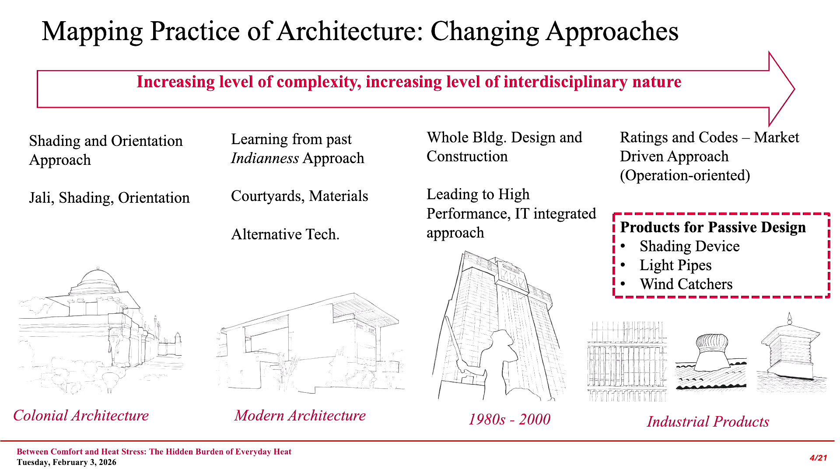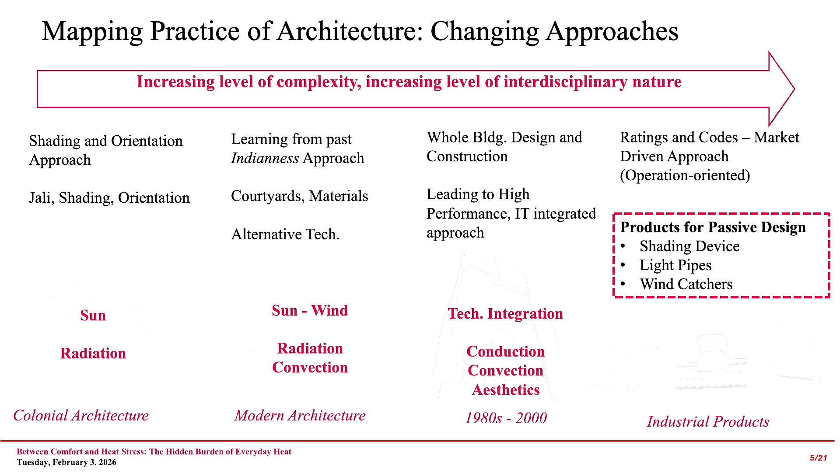So this is basically what I explained: somebody was dealing with the sun and radiation. In fact, in modern architecture, even Corbusier had dealt with the sun and wind very well, which is basically radiation and convection, and then radiation, convection, and conduction, and all kinds of IT systems started coming in. However, from then onwards, the liberalized economy has given us something where you cannot really make any visual difference, whether it is 0 degrees north or 50 degrees north. Delhi buildings are very similar to the buildings you see in the rest of the world. That's when homogenization of aesthetics started happening.

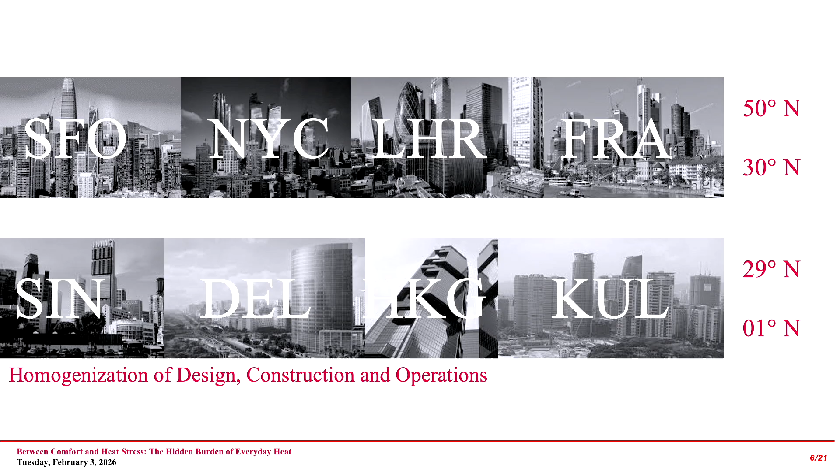And the shift happened towards what we call a tech fix. Architects started leaving the decisions of making buildings comfortable to the engineers. Most of the time we design it in an ABCD manner, and somebody will make it comfortable, somebody will make it stand. So structural engineers also started taking a little more responsibility. And that's where things started changing. While we recognized that, in parallel we also started understanding that some of the buildings which were originally made keeping the climate in focus did not serve as per their original intent.

So I'm giving probably 3 examples here. One is IIM Ahmedabad, second is IRMA, and that is in Anand, and third is again the ATIRA building in Ahmedabad. This is basically a piece of modern architecture. If you look at the plan, section, elevations, you will see that there is a very clear-cut response to the hot and dry climate or composite climate. That means you have thick walls, smaller windows, a bit of courtyards here and there.

However, these buildings did not give enough thermal comfort to the occupants, primarily because of the landscape. So this is where the disconnect started happening. The buildings were made and constructed keeping in mind the climate, but probably the microclimate was not conducive enough for those buildings to remain in hot and dry climate, and it started making a huge difference in terms of vegetation, and the humidity started going up, evapotranspiration rates started going up, and buildings did not really function the way they were designed. So this is what has happened from 1960 to 2015, 2020.

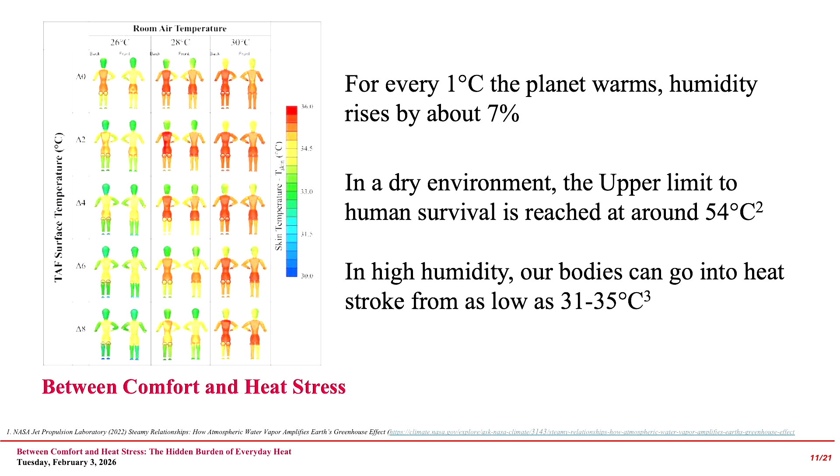And that's where some of the work we are doing with some of the colleagues here has started focusing: how do we really look at humidity as a part of the game. My strong belief is that buildings can deal with temperature plus or minus in some ways, but to deal with humidity, a building as an entity, as a system, has a lot of limitations. And probably I can explain that in a while.

Can buildings really provide us thermal comfort with all passive strategies? I'm not using the words passive cooling strategies because I have some reservation towards the passive cooling terminology, and I believe that passively you can't cool anything. You can cool only with an active system. What you can do is delay, or reduce, but you can't really cool. So with all the passive strategies we are doing, can a building give us comfort, not even heat stress?

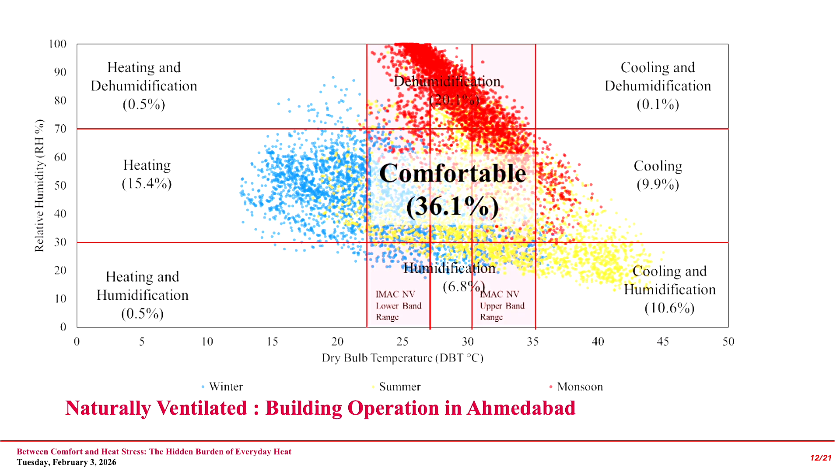And this is the chart which tells you that in Ahmedabad, if you design your building with all passive strategies, in about 36% of the hours of the year you can achieve that through buildings. The rest of the time, you will require either dehumidification or humidification or active cooling, or sometimes heating as well. The two bands are the lower band and upper band of the adaptive model. That means our sensation keeps varying between summer and winter, depending upon what the outdoor conditions are.

Humidity, again, I'm focusing a little bit more on this. In October 24, during the air show in Chennai, people lost their lives. They were hydrated, they had protection from the sun, but the wet bulb temperature, the relative humidity, was so high that they simply could not keep pace with that, and they lost their lives. So again, buildings do need to deal with humidity over a period of time, and that's where the focus is.

Another challenge we have started getting is that we are losing the shoulder periods. Typically in India, winter starts around October and ends around February, then March would be a shoulder period, and from April 15th onwards things start getting warmer. Historic data suggests that the shoulder periods, both March-April and September-October after the monsoon, are reducing.

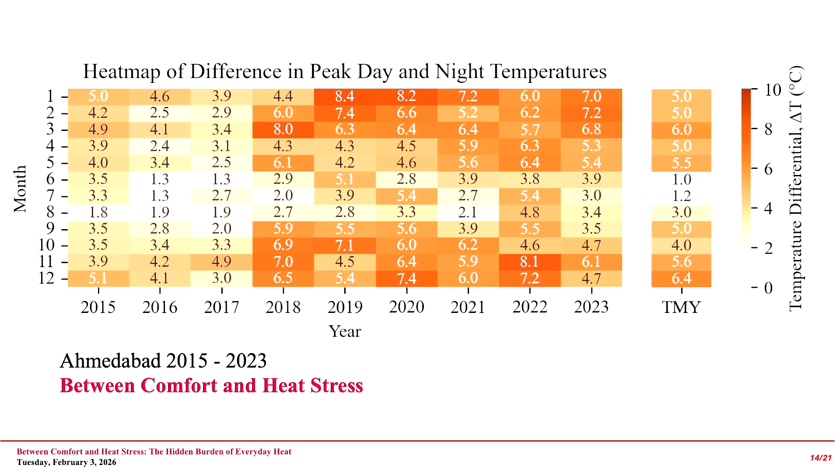Another area, not just about buildings, and that's where I also believe that we need to deal with urban heat. If all the cooling strategies or all the passive strategies need to work, we really need to make sure that our larger setting does provide a similar kind of situation for them to operate.

In the past, in a lot of papers, you'll see our argument about old historic precincts. In Ahmedabad, we call them pol houses. In Maharashtra, they call it Wada. Or in Lucknow, they call them Havelis or Kothis. They used to provide thermal comfort because the larger urban setting was not that warm. Now, the cities have grown, urban settings are warmer, and that's where these historical or vernacular buildings are not the ones who can provide us thermal comfort.

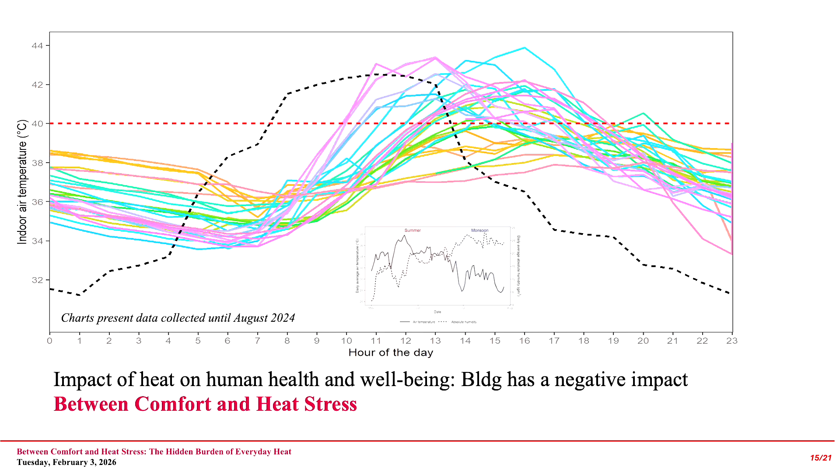The kind of evidence we have started getting also leads us to question sometimes whether nature-based solutions are the way to go. In some cities, definite results say that you can't have trees in a warm and humid climate, because trees increase the evapotranspiration rate, increase the humidity immediately around the buildings, and the latent load goes up, not just the sensible load, and that also increases the cooling. The moment you start cooling, there's heat rejection outside, and you are in a downward spiral. So how do we deal with passive strategies at the city scale is where we are looking at some of the solutions.

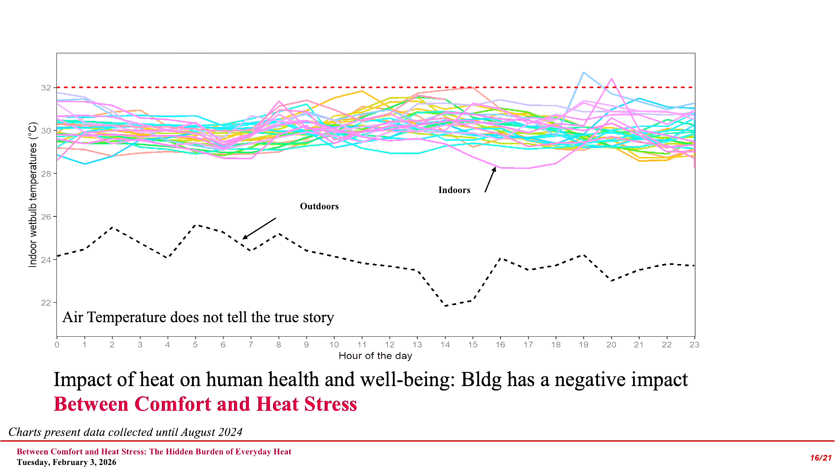This is also another example where your outdoor is lower than your indoors. This is where the building starts giving stress. One of my interviews in the newsletter has this particular part, that the primary function of the building is to provide us comfort. And when buildings do not provide comfort, what can we do? It's basically our third skin. Our first skin, then the clothes, our second skin, and the third skin. If the third skin is not helping us, we really can't manage. And that's where I would like to see the urban scale as probably the fourth skin. And if that fourth skin started helping us, probably the third skin might be useful.

Our work in Chennai does suggest that some of the hotspots in Chennai do not remain hotspots across the day. Some of them are hotspots during the daytime, but they don't remain hotspots during the afternoon, and they don't remain hotspots during the night. And this is where the presence of vegetation and water bodies also comes under the scanner. Do you really need to provide deciduous trees or trees having high evapotranspiration rates in Chennai? Probably not. You might require a ground cover to reduce the radiation, or you might want to see the sky when you have a concrete footpath, pavements or parking lots.

But having concrete pavements and a tree on top, you're not seeing the sky and you're not re-radiating things back into the sky. That means your cities are getting warmer and warmer over a period of time. And this is where some of the solutions we are trying to find through our research, by working with the local government, hopefully we should be able to get there somewhere.

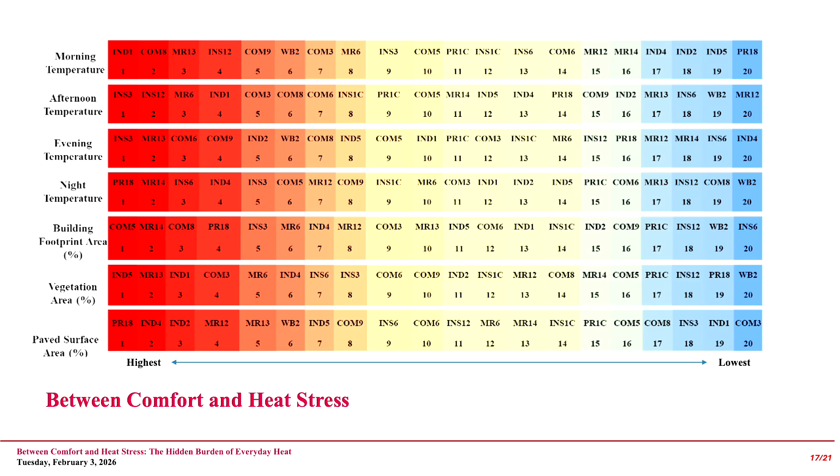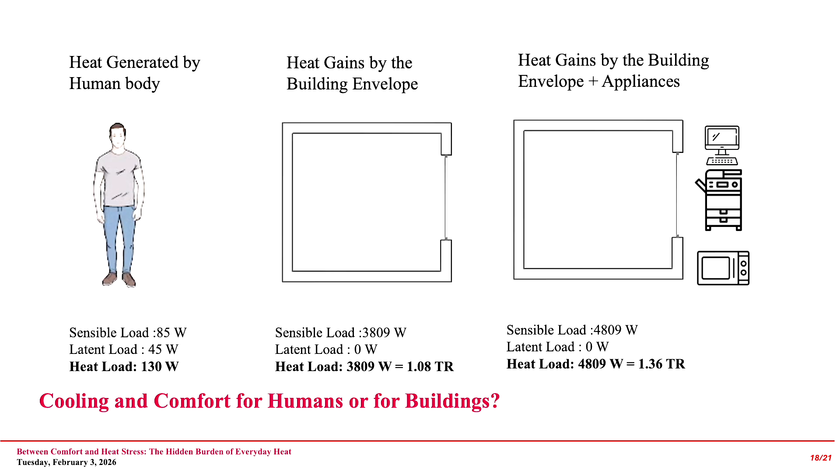Now, if I have to function in that building, probably I'll require some more gadgets here and there. It will go up to probably about 4,800 watts, which is about 1.36 tons of refrigeration. Body requires 130. What we provide with the buildings is about 4,800. And this is where probably we need to do something so that buildings do come closer and closer to that particular part.

And the last point from my side, coming from a university, I really need to think about how do we inculcate some of the culture in the students so that they start integrating this not as a separate layer or as a consultant or someone who can help them out, but from a design point of view, how do they start learning this from day one?

If there are architects in the room, they will recognize that we are being taught proportioning systems, right? How do you really design, whether it is Indian proportioning systems or something from modern architecture? When you start designing buildings, you do deal with numbers in terms of proportioning systems.

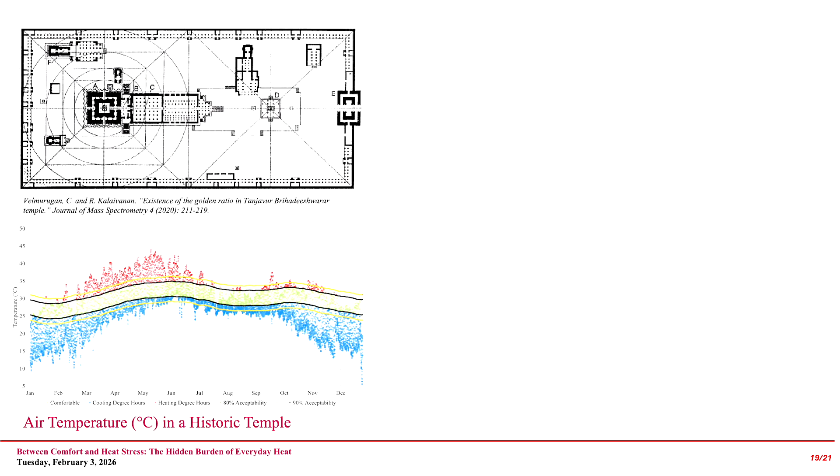In India, we have a very large and very consistent organization of students. What they do is keep doing measured drawings of historic buildings or modern buildings, and there will be a good amount of archival documents available for somebody to look at how these buildings have been designed and constructed. So they do measurements. What we don't do is environmental measurements of any of those buildings.

We do teach how to design a structure. We do teach how to cost estimate, how much time your building will take. So all this is quantification which we teach other than the semantic part. We sometimes also teach how much energy the building will require or how much water the building will require. But we don't teach how much energy the building will use.

So in technical terms, we do calculate connected load, but we don't look at the other side of the meter, how much has been consumed. Not that I have 1 inch of pipe means I will get water. How many liters of water I have consumed is more important than what's my connected load. So I think this is where education also has started looking at that. How do we really inculcate some of these as a part of building science or architecture education?

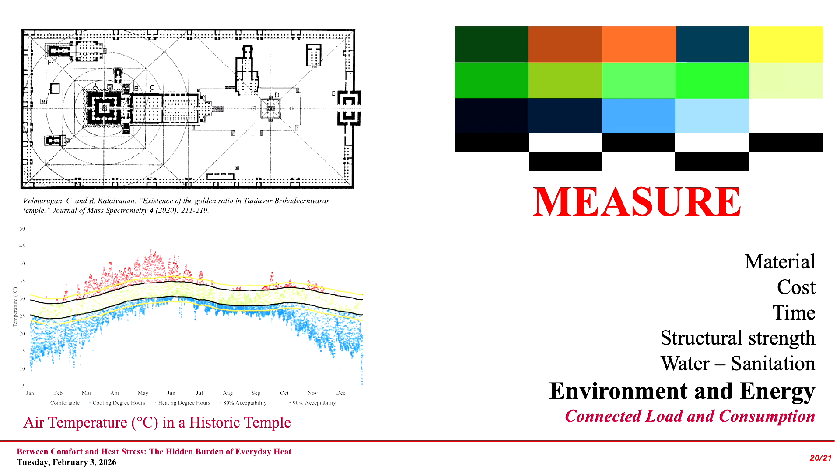And with that, I would like to end my presentation. Thank you.

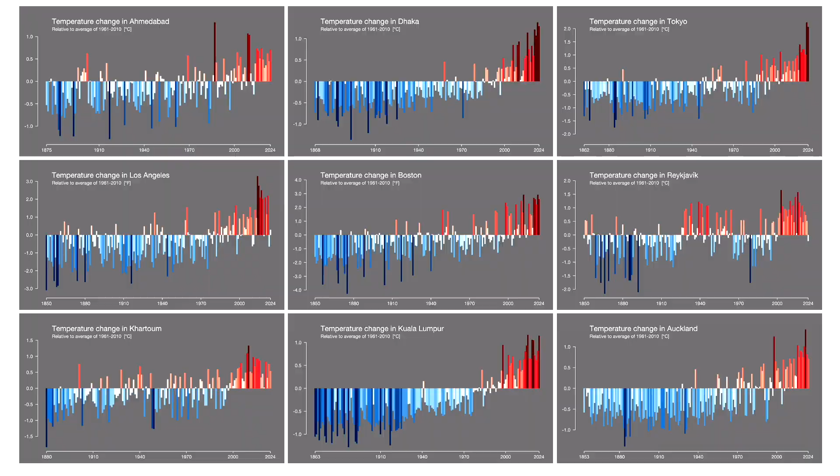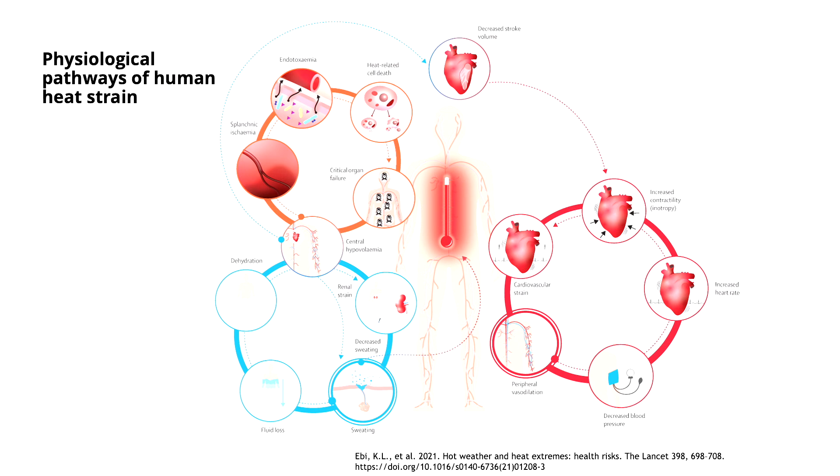It's also important to underscore the fact that we're not just talking about heat stroke, we're talking about exacerbation of a lot of conditions, and seniors can have a lot of underlying health conditions that are exacerbated by excess heat or dehydration and those sorts of things. But we're not going to spend a lot of time dealing with that.

I give a lot of talks where I impress upon folks that a lot of people around the world spend 90% of their time in a room inside, whether it's work, play, school, or home. So these end up being really important microenvironments, and the word hidden was in the title of tonight's event. And in many cases, I've seen a lot of situations over the years where the risks are really hidden to public health professionals, primary care physicians, other decision makers within a city, or community activists.

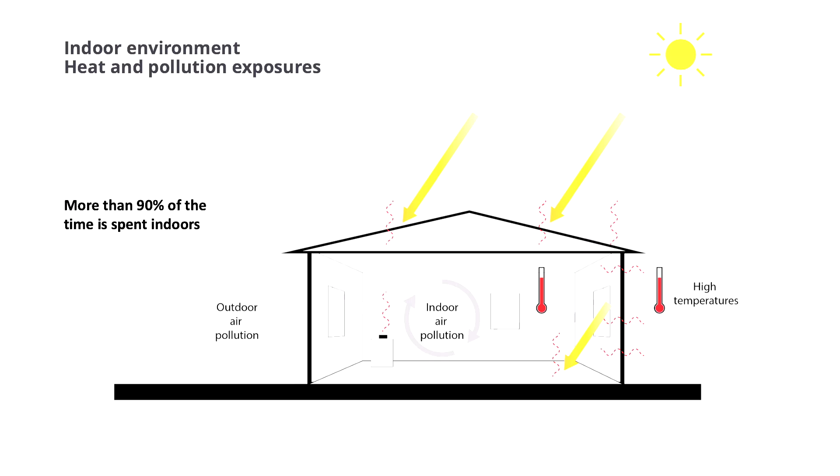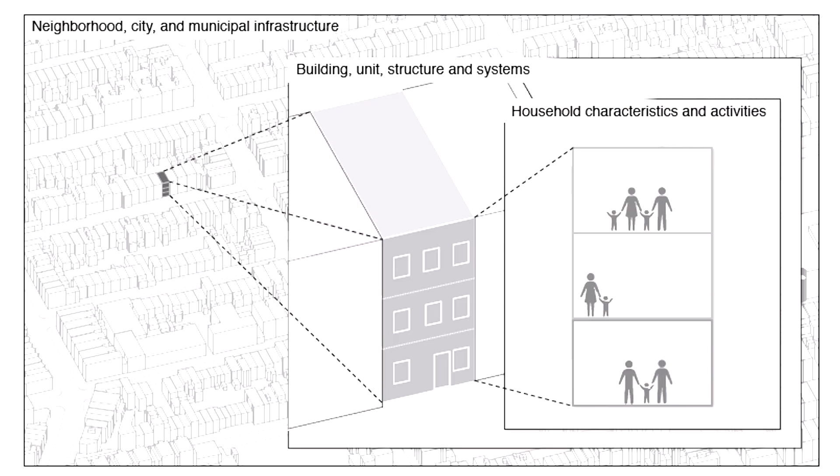And the physics is something we do understand, but homes are actually, in many ways, residences can be more complicated than spaces like this. Spaces like this are designed to be properly heated and ventilated. They don't have a lot of sources in this space. There are a lot of individual sources of air pollution within people's homes. There are a lot of contributors, as Rajan showed, to the thermal load within a home.

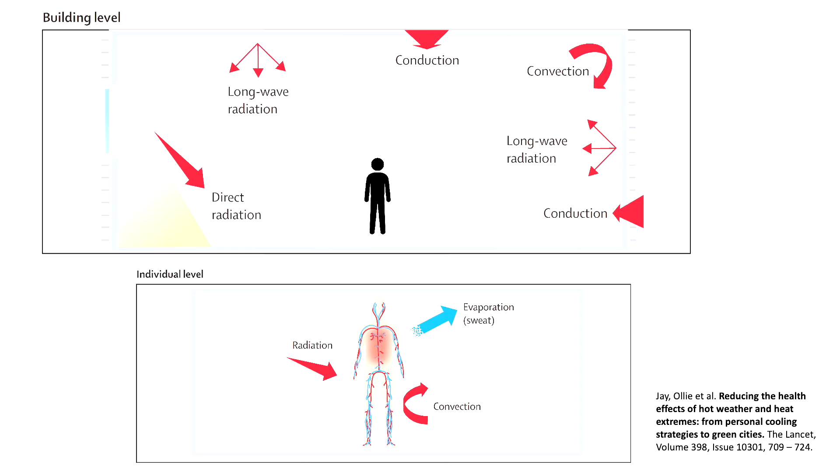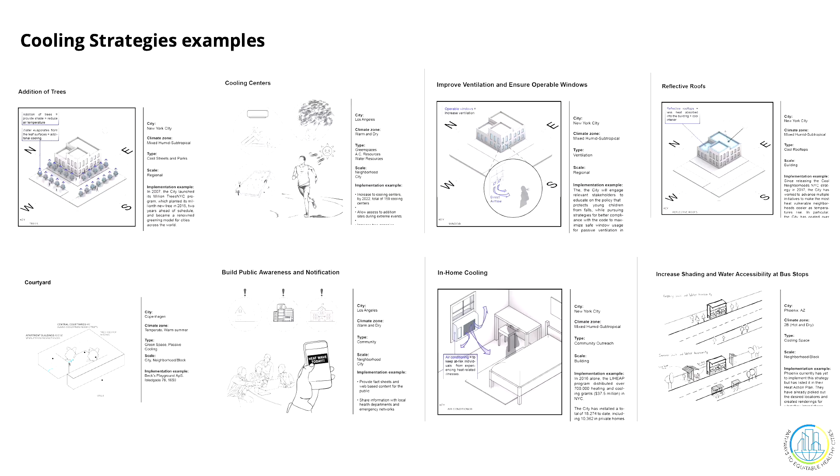So you may not be able to see all these, but these are just examples: in-home cooling, greening, public awareness, shading. More and more, we do know what some of the elements of the toolbox can be. What we need are ways of packaging that for decision makers and leaders in cities. So climate matters, structure matters, material, setting, and behavior.

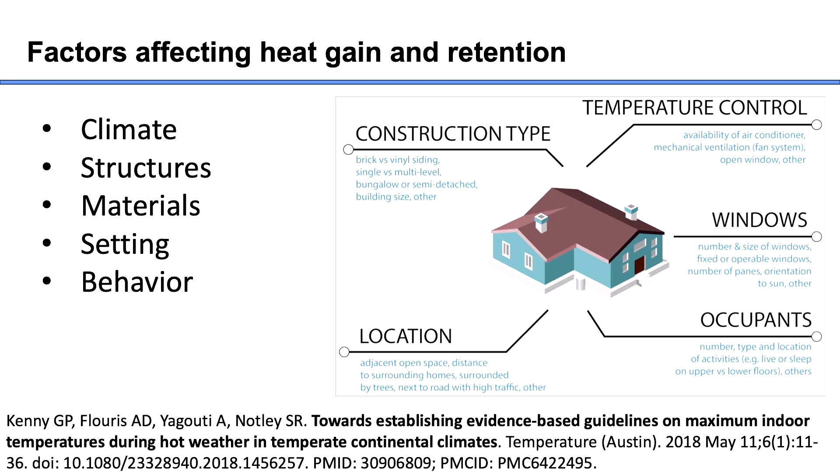The other thing to recognize as a challenge is that buildings don't turn over quickly. If you think about addressing air pollution from cars, every 20 years, the car fleet sort of turns over. Buildings stay around for a very long time. So you have to both think about what you might do for the next building to be built, but climate change is going to affect everyone who's living in a building that is anywhere from 1 year to 200 years old or older. So that entire portfolio needs to be part of the consideration.

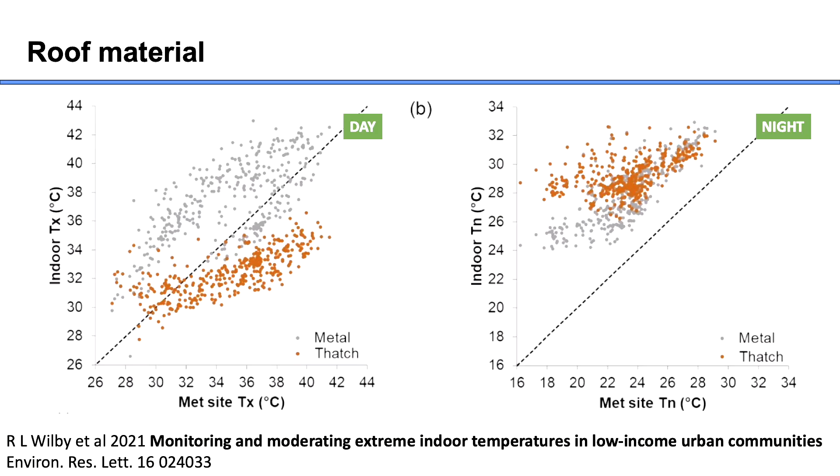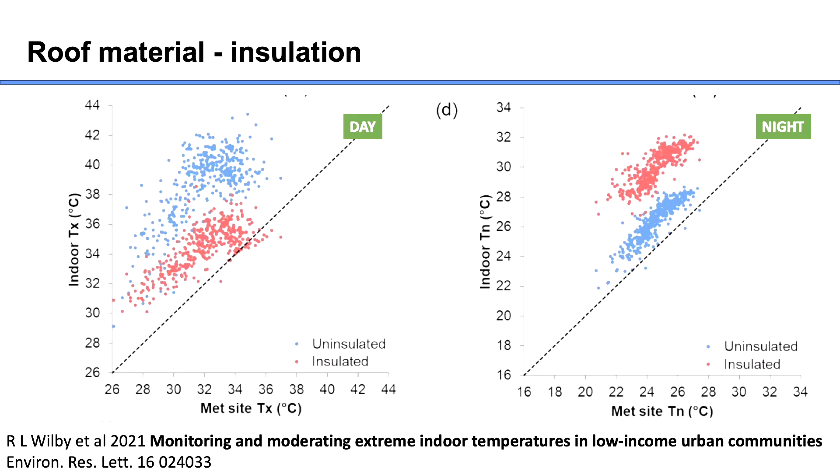There are studies that look at informal settlements where it's not very complicated physics to know that a metal roof has more ability to heat up compared to a thatched roof, that insulation affects the time course and degree of heat being absorbed or released, that green space or shading can sort of affect these things. And also how we use equipment.

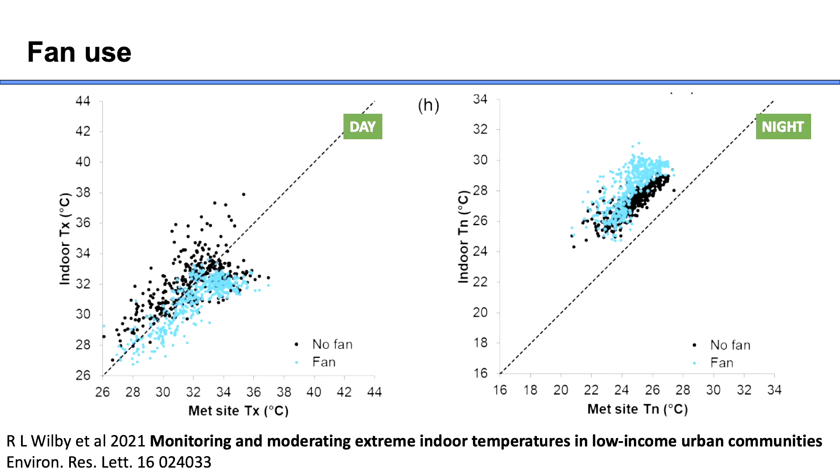My eyes have been opened in the last few years by some of Rob's work on the effectiveness of fan use at different temperatures. That does boil down to basic physics. And some of this has to do with just the physical structure of the building. So the materials we use will affect how these heat loads move back and forth.

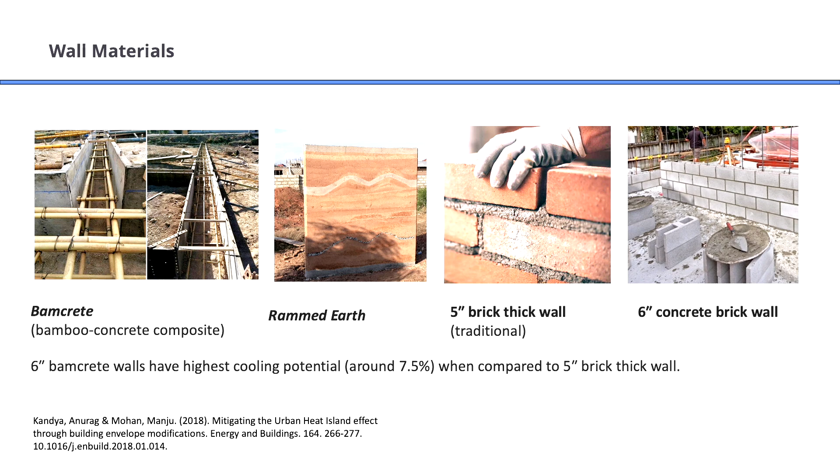But I want to step back and really think about a way of anchoring everyone's thought around experiences that we know of from the past, which are certainly going to become more common. In the popular press, there are a few very globally known heat waves.

The heat wave in Chicago in 1995, the Paris heat wave of 2003. There has been a lot learned, and I want to use this as an example of another way at the city level we can extract information that is relevant to our response for heat waves to come, while we're doing all these other things to allow people to be resilient, like cooling centers or providing cooling or using passive or active approaches.

The heat wave in Chicago happened in 1995. It's been estimated that there were approximately 700 deaths. Now, the epidemiology that's been done on this heat wave is not necessarily transferable to every other situation, but just to give you a sense, when the data were analyzed, individuals were more likely to die if they had known medical problems and were confined to bed. You can imagine that, but it's an odds ratio of 5.5, 4.1 times more likely if folks were unable to care for themselves.

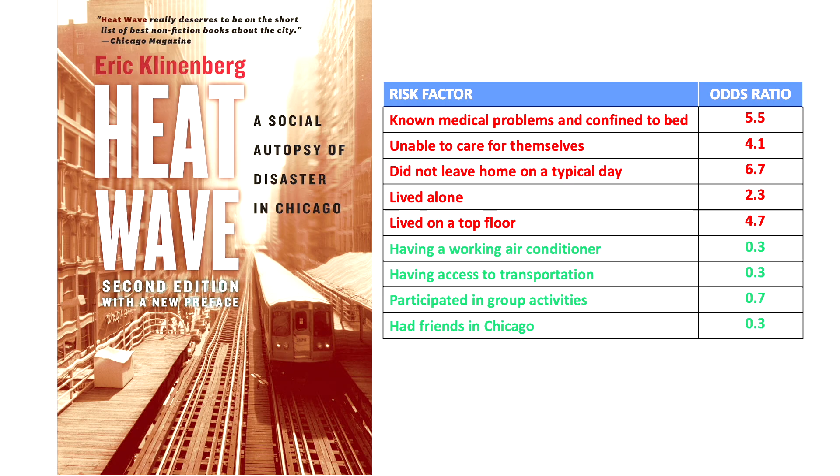If on a typical day there was evidence that they did not typically leave the home, 6.7 times. If they lived alone, 2.3 times; lived on a top floor. There were certain characteristics that were protective: having a working air conditioner, once again, not rocket science, having access to transportation. These both reduced risk by about a factor of 3. Folks who participated on a regular basis in group activities had lower risk. And just having some evidence that the individual had a circle of friends in the Chicago area.

There were similar trends if you look at a lot of heat waves city to city. If you look at the evidence in Paris, there's an element of Paris's architecture that a lot of people admire, which are the metal roofs. Those are, not surprisingly, very effective at absorbing heat. So a zinc roof, in direct sun, can achieve a temperature of 140 Fahrenheit, 60 degrees Celsius. Paris is obviously not going to change all of its roofs overnight. This is the majority of buildings in the center of Paris.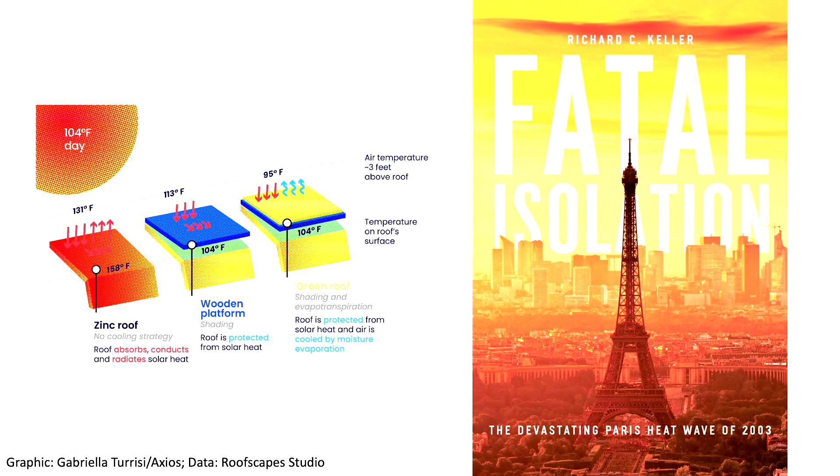But once again, if you break this down into elements of the building, the design, elements of the systems that are in place, and elements of human behavior, you can start to break this problem down into manageable parts. And people have modeled this, and people are trying to intervene by replacing some of these roof materials to allow those roofs to be cooler. And it was found that in Paris, folks who lived on the top floor were more likely to die in the heat wave. So I want to step back again and think about some more contextual thoughts I'd like to leave with you.

This was a paper that came out a few years ago which I think makes it real for a lot of us, even those who have seen all the temperature records. This shows how climates are going to shift over the next few decades. So the city of Portland, on the northern west coast of the United States, will in the next few decades have the climate of Fresno. Los Angeles' climate will effectively become the climate of Baja California. Tampa will have a climate that looks more like Mexico. You could do this in many places around the world.

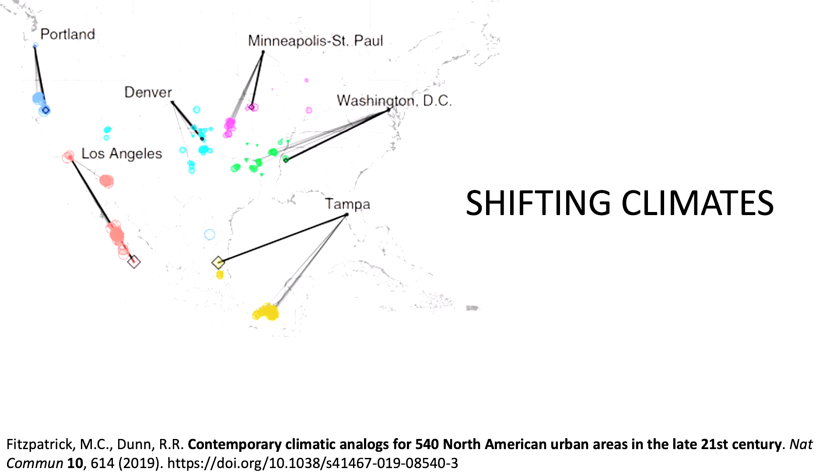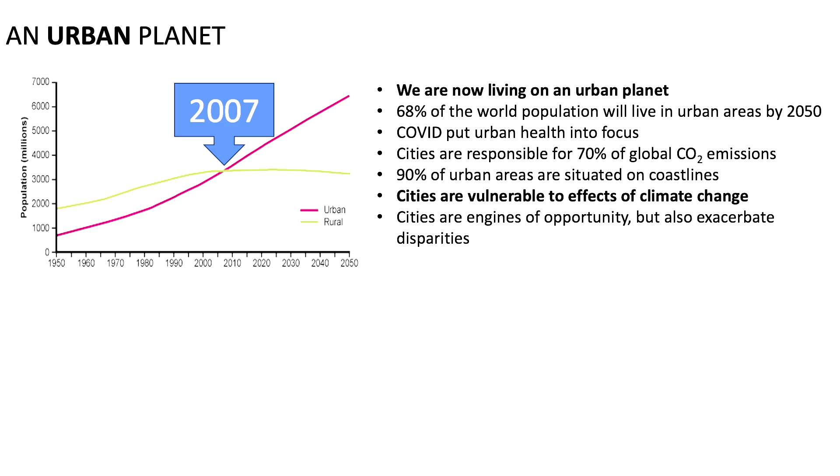I don't need to tell everyone in the room that we're now living on an urban planet. Since 2007, more of the world's inhabitants live in cities than in rural areas. Cities are on the front lines of public health, the front lines of climate change. It's not only a place to understand what's happening with health and what's happening with the environment, it's also a place where solutions can happen effectively. Local leaders need to answer to local problems.

I hope that COVID was a wake-up call, that every city in the world had to deal with the nature of COVID and how it spread in their city. And it's another example where there are commonalities, but there were specifics. The way things spread in New York City was different than the ways things spread in Los Angeles or other cities.

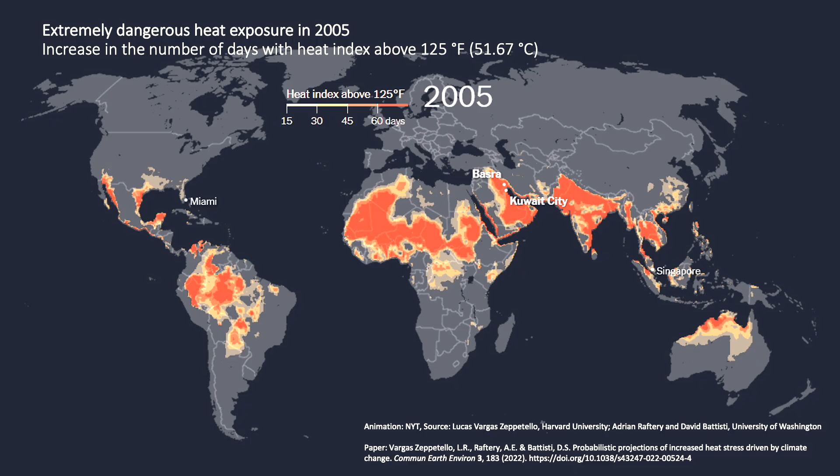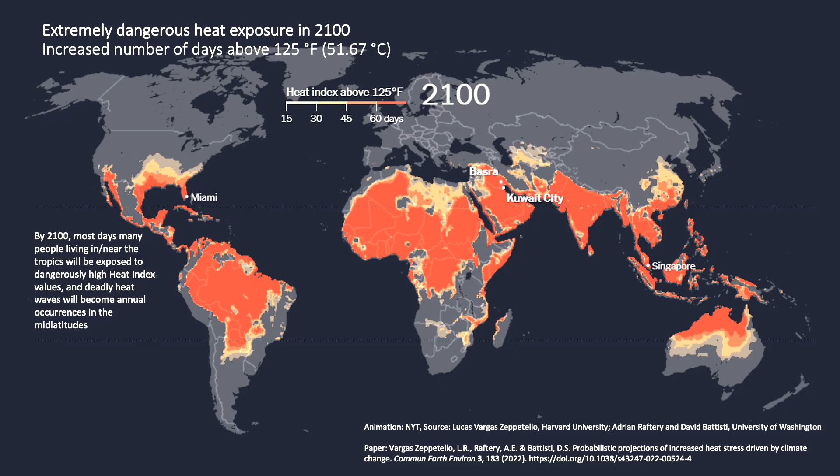Not all that population growth will be protected from the effects of extreme weather, from the effects of extreme heat. If you look at 2005 and especially places that had very high heat indexes globally, and project that out to 2100, the extreme population growth in the global south, the risk for heat in the global south is an issue that the researchers in this room, as well as the decision makers around the world, need to wrestle with.

I already mentioned the fact that we have a global housing affordability crisis. Housing affordability does affect environmental risk and health risk. The more unaffordable homes are, the more people live in conditions that provide more risk to their health.

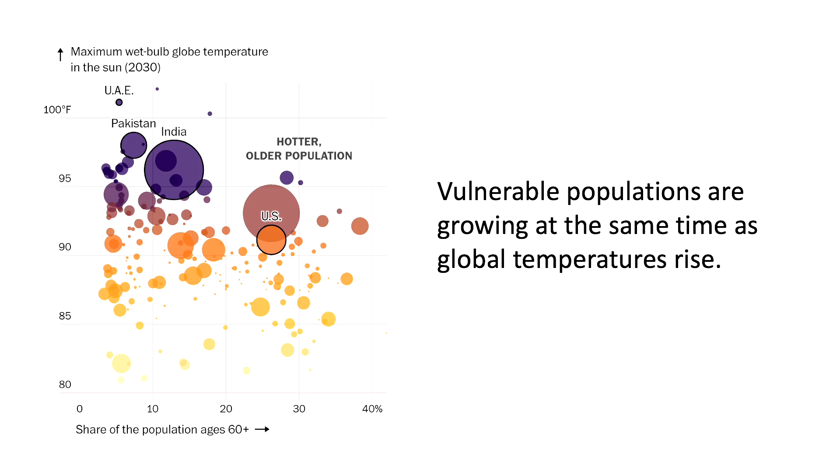If you look at this figure, it shows on the x-axis the share of the population over 60 across the wet bulb globe temperature. There's no doubt that an aging population is going to feel the effects of climate change more dramatically. Also, the other thing which is unavoidable is that even though we have approaches such as passive approaches, the demand for cooling is going to put even more pressure on the climate.

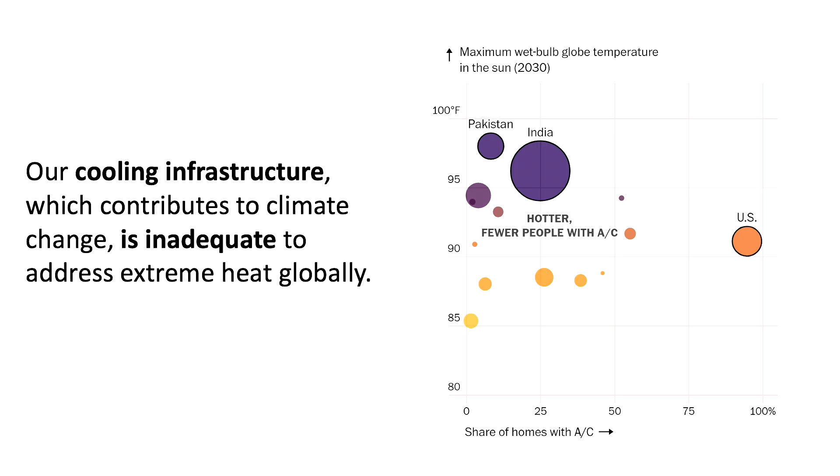And if I could have one wish outside of my field or inside of my field, it would be that we could advance the line towards more efficient cooling. That's a very tough problem. So as I close, I'll just bring you back to more local work.

Last year we started an intervention focused on high-risk adults. These are adults over 55 who had underlying health conditions, who did not have access to air conditioning. This was one of those projects that was halted by the federal government, in news you may have read about. And so we're now hopefully back on track for this year.

The reason I bring it up is, in some way it seems like a very linear, run-of-the-mill intervention just to give out air conditioners. But the more I do work that involves being in people's living rooms, working with affected communities, there's always something to learn.

One thing that came out just from last summer is how many families in Boston were not necessarily in either category. There were folks who didn't have any AC, but there were a lot of folks who had some access on paper to air conditioning, but it wasn't adequate. So there are folks who might have one air conditioner in a 3-bedroom apartment.

They chose to put it in the room of the person in the home who needed it the most. That might have been a child or an elder. There were folks who had very old air conditioners that they got secondhand, which were effectively blowing warm air. There are folks who, when pushed to buy an air conditioner, ended up buying a very cheap model, a model on sale that ultimately did not have enough power to cool the entire home.